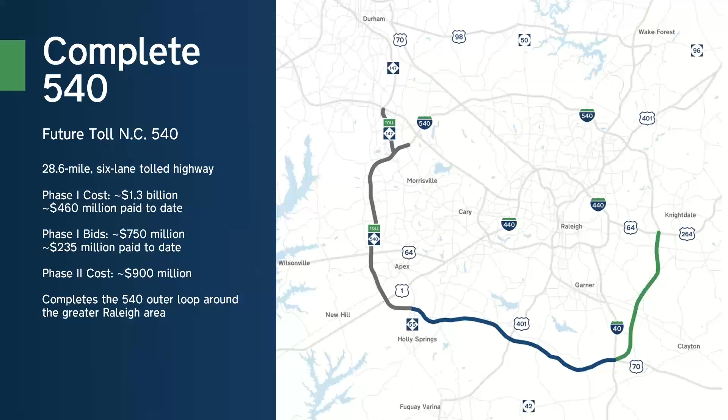This is one of the projects under construction right now. The area shown in blue is a corridor that's under construction, and we hope to open that up in a few years—it's essentially an extension of the Triangle Expressway from Holly Springs over to I-40. The line in green is the next phase of the project, a bit further out—not yet under construction, but under the planning process right now. Ultimately, this would complete the outer loop in Raleigh.

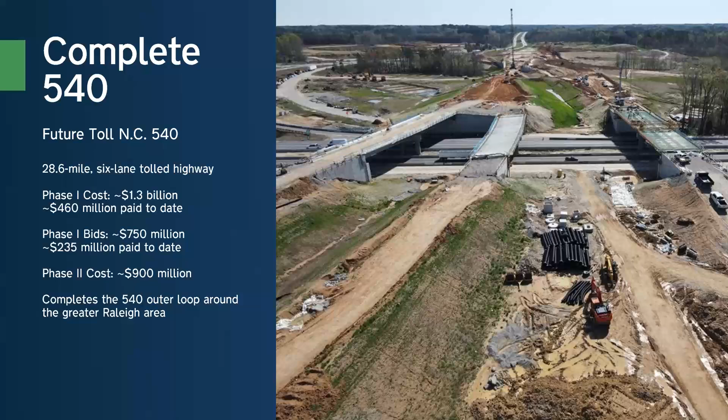This is a picture of the 540 construction near the I-40 interchange. It's a large turbine interchange with a lot of bridges and movements, and it also incorporates the US 70 bypass that heads into Clayton. It's a very complicated interchange—if you've driven along I-40 recently, you've seen the amount of construction going on, not just from our project but also the I-40 widening out there.

Another project I'll talk about is the I-485 express lanes. This is a DOT project—a widening of I-485 to include express lanes along the corridor. It's roughly a 20-mile corridor between I-77 and US 74, through the Ballantyne area, Weddington, and Matthews, a very congested interstate for those of you from the Charlotte area. The DOT is underway with construction to add one express lane in each direction, with a little widening and some new interchange work. It's a very large, very complicated project that I'll talk about coming up.

It's under construction, and this is something we're really involved in from the Turnpike side, as we partner with the DOT. Like I-77, our role on this project is to install the toll collection equipment, operate that equipment, collect the tolls from customers, provide customer service, and act as the toll operator on the corridor. There's still a lot to be worked out with the DOT on the ultimate operations of the corridor, but our role is certainly to collect the tolls, as we do on the I-77 express lanes. We expect this project to open up around the 2024-2025 timeframe.

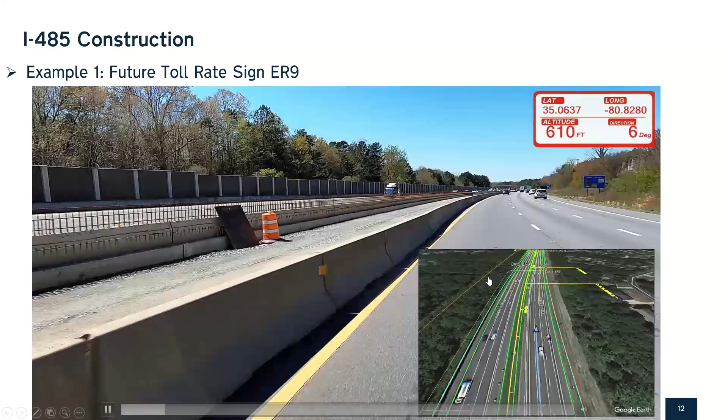This next video here, this is an area where the contractor just shifted traffic over to the median side. So the area that the vehicle is riding on right now will someday be express lanes. Right now the contractor shifted traffic from the outside to the inside as they continue widening on the 485 corridor. But there's a lot going on with this project right now.

As I mentioned, it's just a huge project. A lot of coordination going on between us and the DOT for certain. So that gives you all an idea of hopefully what the Turnpike is about in terms of our projects that we're operating and projects that are under construction or planning.

I did want to spend a little bit of time talking about my thoughts on looking forward to the future on the engineering side. What's coming up? Where does the Turnpike fit in with the Department of Transportation? What are some of those engineering concerns I've seen as we've evolved from where we were at with the Triangle Expressway to where we're at today? So I'll comment a little bit on that and share some stories, and then Manish is going to take over from me and talk more about some of the forward-thinking ideas he has from the customer service and toll operation side.

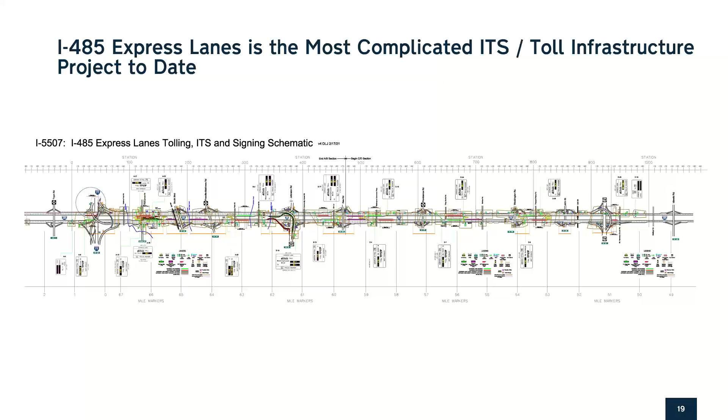I know you can't see this, but I want to share it with you. This is something one of our team members put together - we use it all the time, it's printed out on our wall. It shows the 20 miles along the corridor, and those hundreds of devices are identified here along with the ingress and egress locations.

So these things don't just happen - a lot of time was spent after the project was let to coordinate with the design-build team, whether the contractor or the residency office, so they understand what we're building in relation to the toll equipment. It's fairly new when you get a contractor that hasn't built a toll road before in the state - this is all foreign to them. So we spend a lot of time at the Turnpike explaining what these things are and why the road is designed the way it is, so that downstream we have a really good product.

This is my last slide, and I really just wanted to wrap it up for everybody. I mentioned the future - as the department looks at other types of toll projects, whether peak shoulder lanes, new express lanes, bridges, or even standalone toll projects, the coordination on these projects may be a little bit different than you've seen on projects in the past.

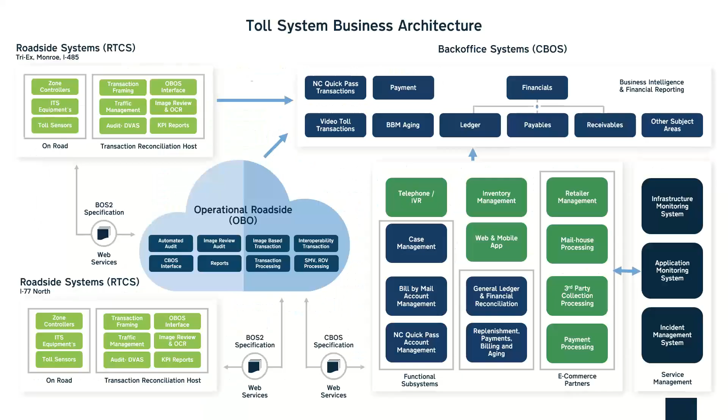It's an interesting way to use tolling — I always tell folks thinking about peak shoulder projects that it's not necessarily about generating revenue, but using it as a traffic management tool, just like ramp meters or overhead lane control signs. Tolling would be a different way to help manage folks and allow them into that peak shoulder lane during peak times. All the details haven't been worked out yet.

One thing we'd consider is using the peak shoulder lane during the top three or four most congested hours of the day. It would likely work with overhead gantries reading the transponders Manish talked about, connected to our back office system, involving a series of lane controllers, cameras, and toll rate signs — a lot of the same parts and pieces you saw on the 485 express lanes.

So this would be a new concept for North Carolina, but it exists elsewhere — Colorado uses peak shoulder lanes through the I-70 mountain corridor west of Denver, and there are some up in the DC area. Those would be models we'd look at. But it's a good example of an innovative project that could be coming our way.